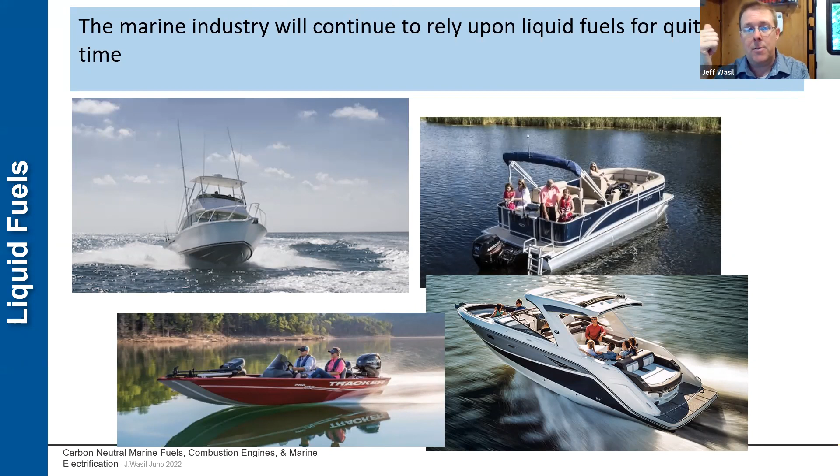This is really driven by two things. Number one is the very slow retirement rate of boats - 12 million registered power boats in the United States. Of that, we're seeing about just under a 2% annual retirement rate. So it's going to take a long time to turn this fleet over.

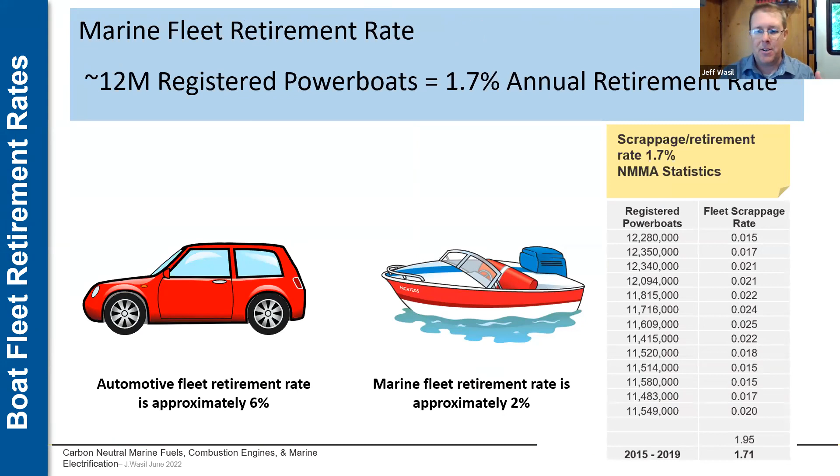Number two is really with respect to energy density. If you take Tesla as an example, they've got a long range model, 348-mile range, looks like a car, drives like a car. The acceleration is second to none. It's incredible if you haven't driven one. But a lot of people don't realize that same vehicle, if it were operating according to the way a boat operates, the ICOMIA duty cycle, it would only have about a 33-mile range. And that's because it takes over 10 times the energy to move a recreational boat through the water compared to a car.

Now, just to be clear, we're talking about boats that are planing. We're not talking about displacement hulls. We're talking about planing boats.

So a lot of what you're seeing in terms of policy right now is related to the ability for electric vehicles to reduce CO2 emissions over their lifetime. If you take a look at this graph here, you'll see that the initial production of the battery electric vehicle results in about 50% more CO2 emissions than the internal combustion powered vehicle.

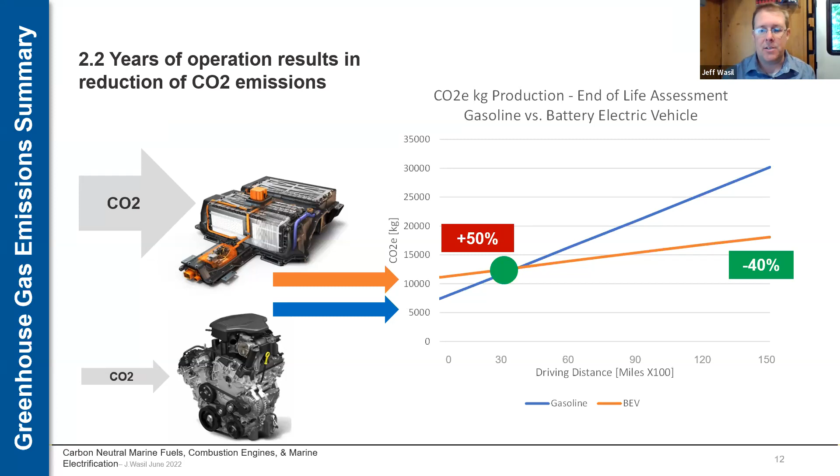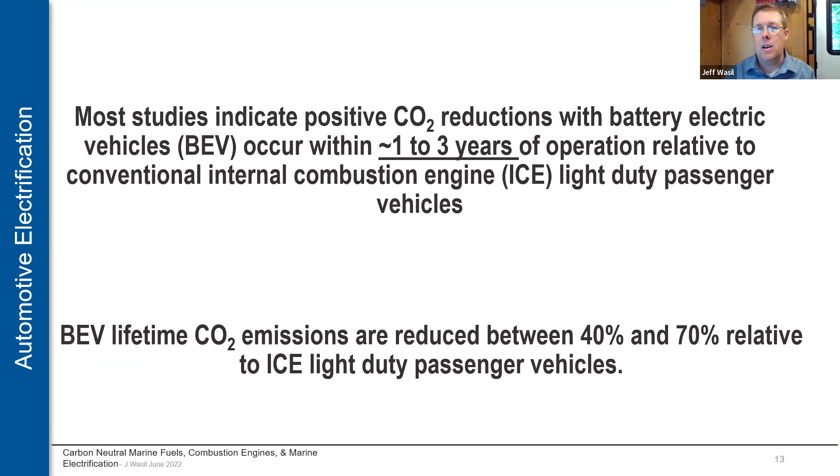However, at the end of its useful life, which is 150,000 miles, you'll see that emissions of CO2 have been reduced by about 40%. You reach a break-even point just over 2 years of operation. And that's what the majority of studies are showing. They're showing that we have positive CO2 reductions with battery electric vehicles occurring within about 1 to 3 years of operation relative to internal combustion engines. The battery electric vehicle lifetime CO2 emissions are reduced by 40 to 70%. So that's why you'll see such a big push toward electrification for the automotive industry.

So the solution is clear, right? We need to ban all combustion powered boats and move completely to electric. I get folks all the time that say, hey Jeff, why are you continuing to work on internal combustion engines in addition to electrical development? Just put a battery pack in it and an electric motor and you'll be done.

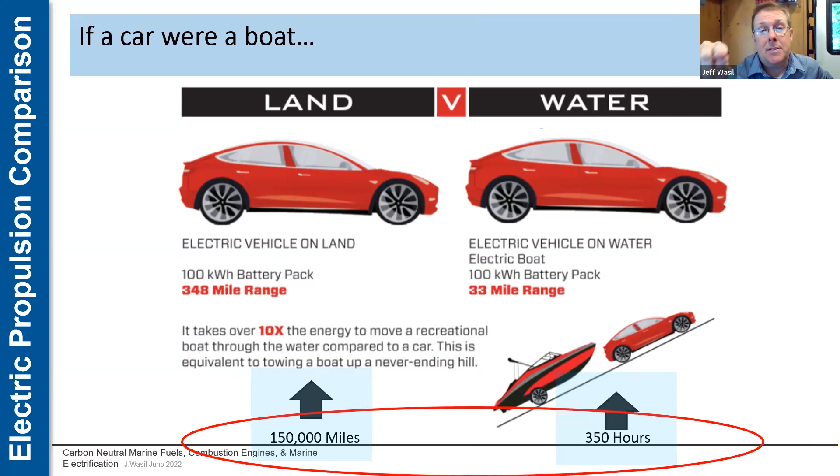Well, there's certainly some challenges to that, and I just want to explain this. I want to come back to this slide because this is really important. If you look at what's happening with battery electric vehicles, everything is amortized over a period of 150,000 miles of operation. A typical recreational boat, according to the EPA, is used about 35 hours a year, with a 10-year useful life. So these are very different fundamental things.

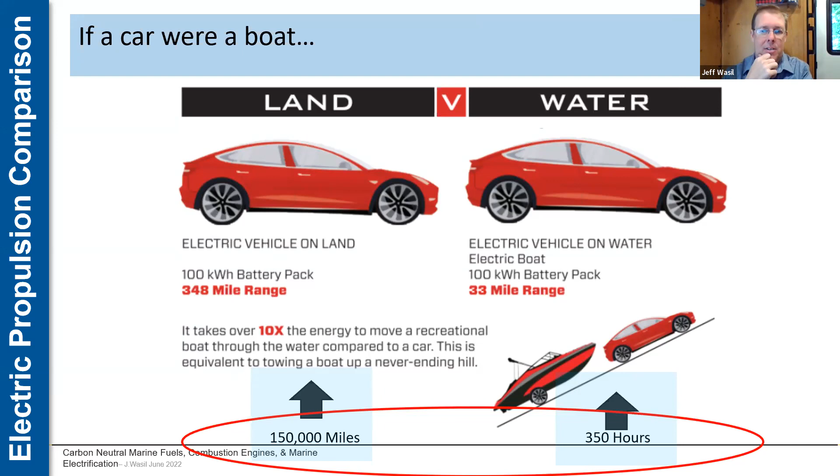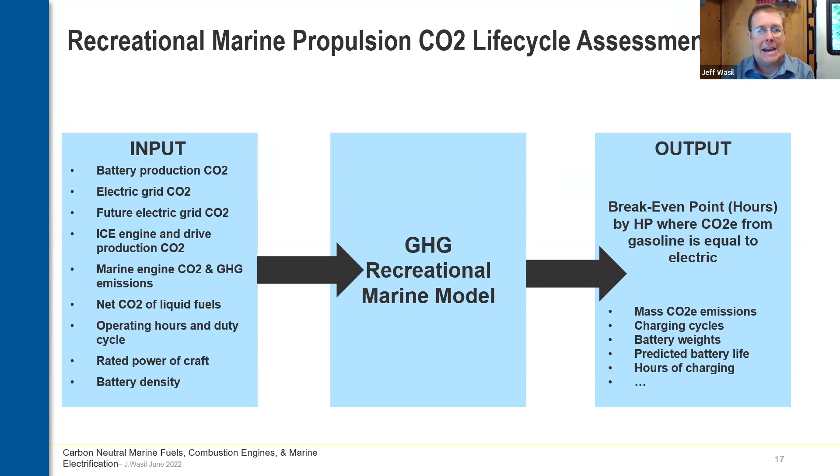In order to answer this question, how effective is battery electric propulsion in reducing CO2 emissions from the marine sector, I needed to create a model. For inputs, I'm looking at the amount of CO2 to produce a battery, the CO2 from the generation of electricity, the future electric grid, battery density, future battery density, the types of craft, and so on. The output from the model is the break-even point in hours by horsepower, where CO2 emissions from gasoline is equal to that of electric.

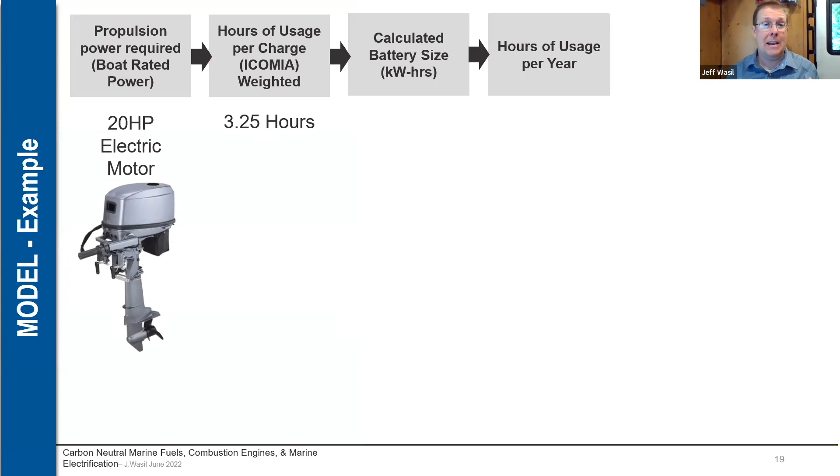Let's take a look at the model for a 20 horsepower electric motor. You're going to operate that for a period of 3.25 hours, so this is really your range. According to the duty cycle, you're going to have just over 3 hours of range. There's some science behind this number which I won't get into right now because we don't have enough time. But this calculates out to about a 10 kilowatt hour battery pack, and you're going to operate it 35 hours a year, or over 350 hours over a 10-year period.

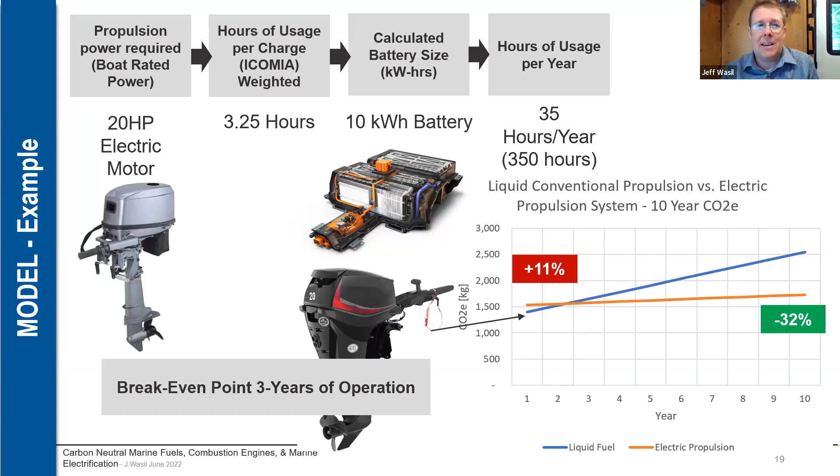So let's take a look here. The initial first year of operation, that electric motor and battery is going to result in about 11% more CO2. But by the time you reach the 10-year end of useful life, you've reduced CO2 emissions by about 32%. You break even over a period of 3 years. So this is pretty reasonable—this is very, very plausible in terms of its ability to reduce CO2 emissions.

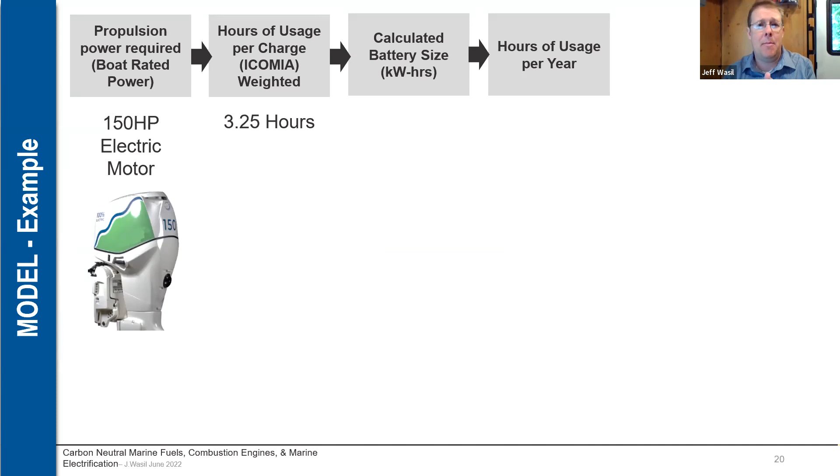Let's take a look at a 150 horsepower motor. Same thing, we're going to have just over 3 hours of actual operation according to the ICOMIA duty cycle. So we require a 75 kilowatt hour battery, and we're going to operate at 35 hours a year. In this particular example, because of the energy intensive process of producing the battery, your year one operation of this vessel is going to increase CO2 emissions by about 250%. You'll reach a break-even point at 9 years, and you'll have the ability of reducing emissions by about 10% at the end of that 10-year period.

Now a lot of people say, hey Jeff, 35 hours a year is not a lot, I'm going to spend a gazillion dollars on this electric boat, I'm going to use it more than that. So let's say 60 hours per year. Here you'll start to see the situation gets a little bit better. Your initial year one, you're going to increase CO2 emissions by about 181%. You'll reach a break-even point of 5 years of operation, and by the time you're done, you'll reduce emissions by about 35%.

So let's take a look at one more scenario here. Let's suppose for a minute that you have a lake that has a supercharging station, and you're willing to sacrifice the range in order to have a smaller battery. So instead of 3 hours, you have 1.5 hours of operation. This brings your battery size down to 35 kilowatt hours, and you're going to operate 60 hours a year.

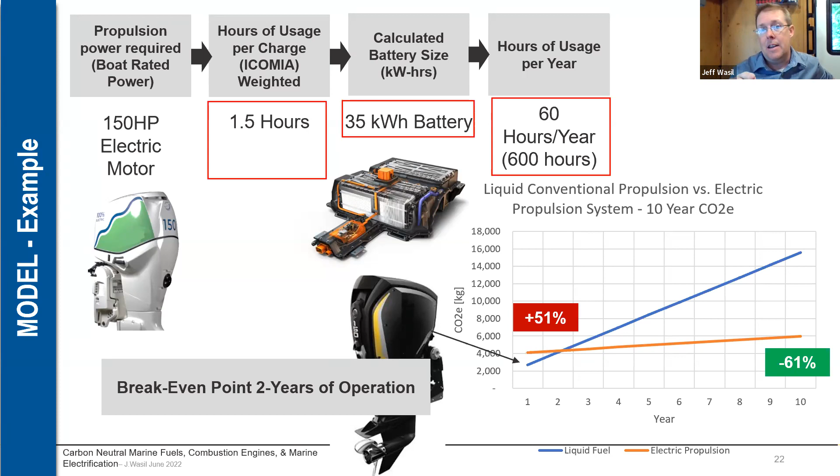However, there's a fundamental flaw in this assumption, and that has to do with the charging cycles of the battery. A typical lithium ion battery only has about 300 to 500 cycles. This is going from nearly fully discharged to fully charged before you reach a degradation in battery state of health. And with this example, you're bumping up right along that 500 cycles.

So back to the Tesla example again, you had 150,000 miles, 348-mile range. Over the course of that 150,000 miles, you're going to have worst case 431 cycles. So that's really where it gets a little bit tricky with

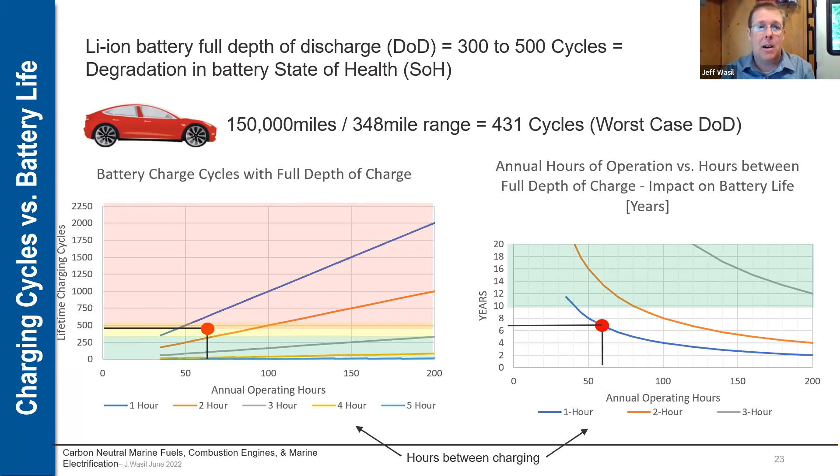Boats. Now, how do you get around this? Well, really, fundamentally, you would need to use a larger battery, but the challenge is the battery weight. Certainly, I don't think we have any issues with electric motors in terms of their ability to propel boats, but the challenge is always related to the battery, and that's what everyone in the world is working on right now, trying to reduce the weights of batteries.

It's not as big of an issue in automotive because of rolling mass, but here's a perfect example. 6 pounds is the weight of a 1 gallon of gasoline. Of course, you can't use all the energy in a gallon of gas. So the equivalent amount of energy is about 152 pounds of batteries. So you can see how quickly a typical 30-gallon gas tank would weigh about 4,500 pounds.

That would reduce your person's capacity and flotation and the rest of the boat. So that's really fundamentally one of the challenges that we're dealing with, is trying to plane that boat.

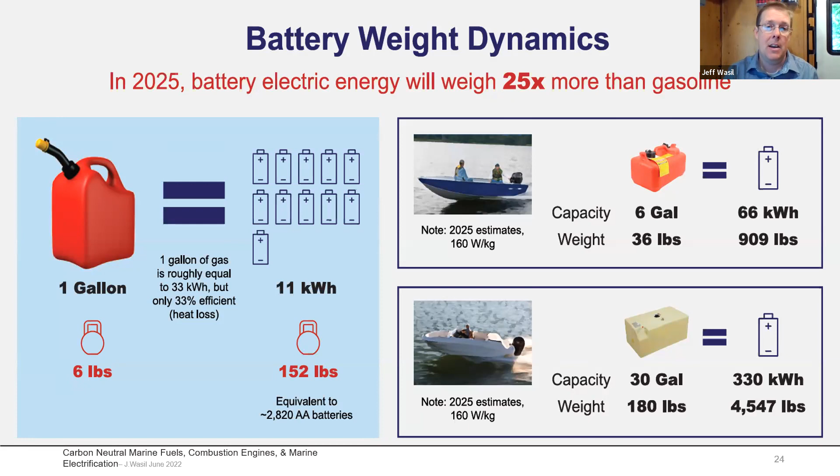So we'll wrap up here in a second. So let's take a look at the model. So let's summarize for a second.

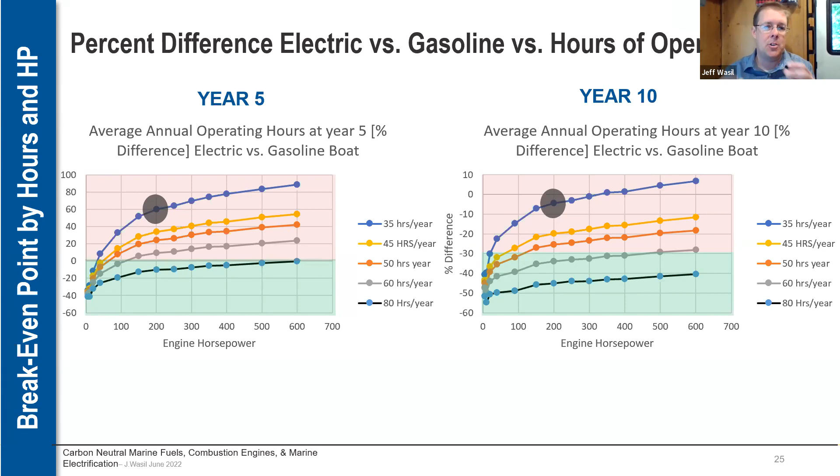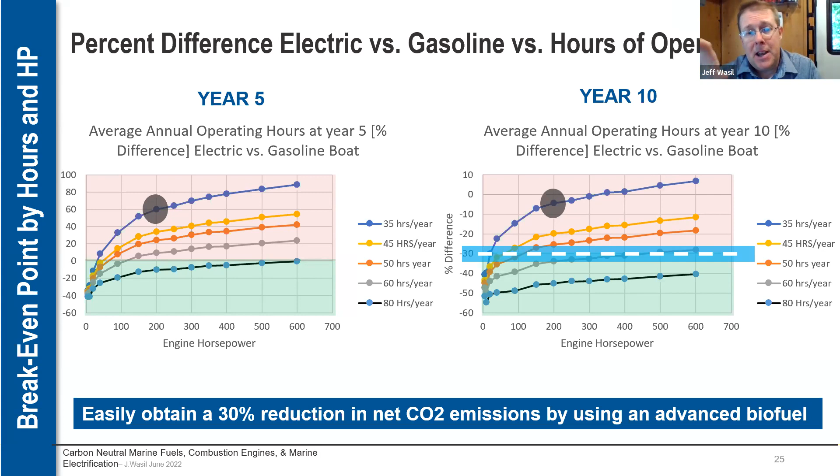If you had a 200 horsepower electric boat operating 35 hours per year, at the end of year 5, you would create about 60% more CO2 than an internal combustion engine. At the end of year 10, which is the graph on the right, you would reduce CO2 emissions by about 5%. Now you can really start to see how the hours of operation is really critical in understanding the CO2 reduction potential. And you can see as you go smaller engines, it's also a lot easier to achieve positive CO2 reductions with electrification.

So now it's very easily we can obtain a 30% reduction in net CO2 emissions by using an advanced biofuel. And a lot of folks say, hey, Jeff, biofuels are not sustainable. They tear up the land, they divert food crops. And I would tend to agree with those folks in the context of a 146 billion gallon gasoline market.

We're producing about 16 billion gallons of ethanol in the United States. It's just not simply enough. We just don't have enough biofuel to really make a meaningful difference. And that's why you're seeing electrification gaining popularity.

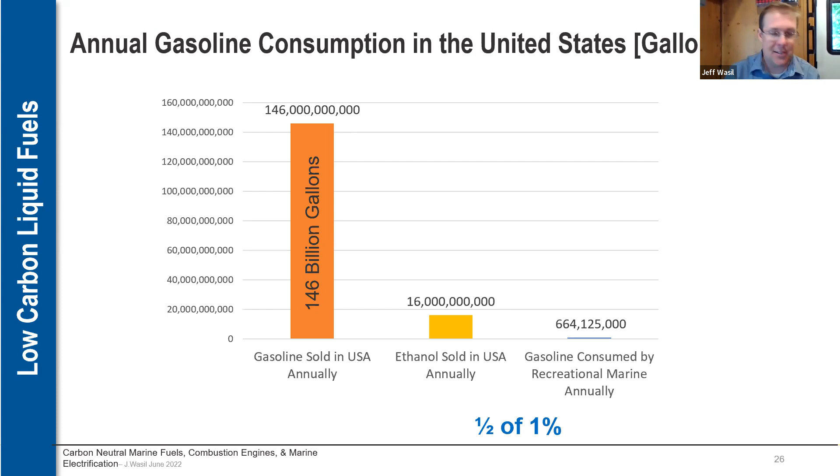Well, guess what? Recreational marine only accounts for about 665 million gallons, which is, by the way, 0.5% of the gasoline consumption in the United States. So we have an opportunity here. There's really two industries that can benefit significantly from liquid fuels or e-fuels.

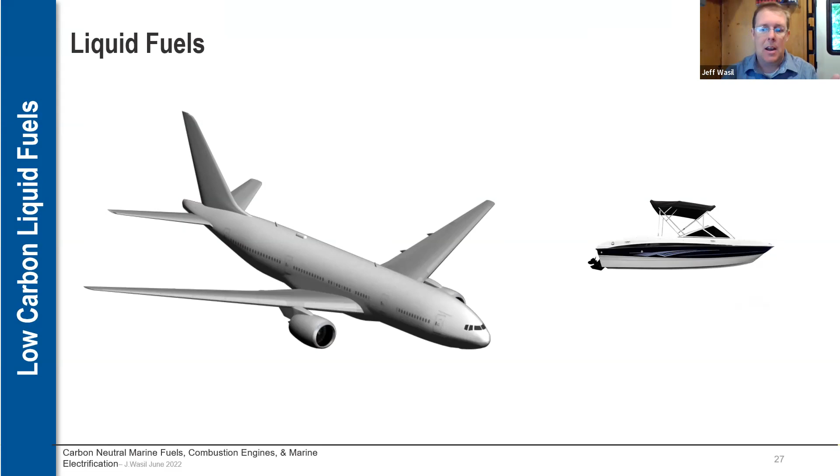Aviation is one of them. They're pushing hard for that. You see a lot of work with sustainable jet fuels. We've pioneered a lot of work as an industry on biobutanol, helping bring a next generation biofuel to the consumers, and it could address a lot of the existing products that are out there.

So in summary, the life cycle carbon emissions of propulsion systems are highly influenced by the hours of operation and power output level of the vessel. So if you're going to buy a boat and you never use it, then certainly, the CO2 emissions are going to be much lower than if you were to produce that battery electric boat and not use it.

Lower horsepower marine engines could more easily justify electrification from a CO2 reduction standpoint, particularly with lower operating hours. We need to have careful understanding of the application, and the annual hours of use for electric boats need to be considered. So it's not just a blanket statement.

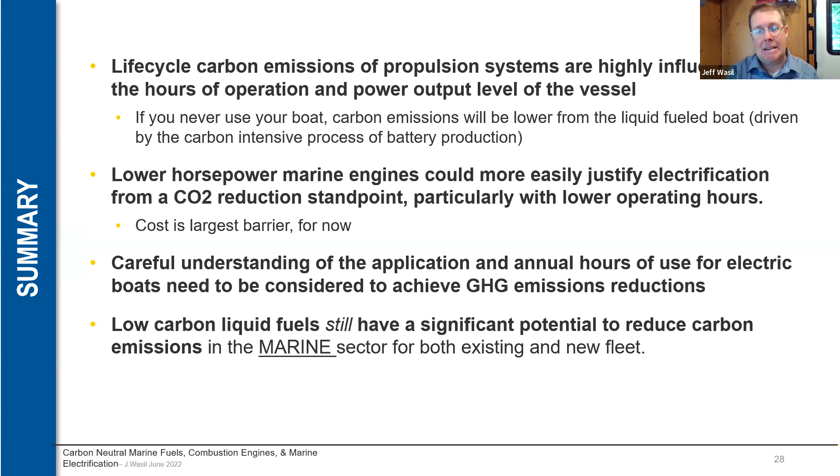You've got to really fundamentally understand how many hours you're going to put on the boat and how you're going to use that. Low carbon liquid fuels still have a significant potential to reduce carbon emissions in the marine sector, both for the existing fleet, the 12 million boats that are out there today—you can have an impact right away—and for the new fleet that we're working on. So really what we want to do in terms of next steps is to aggressively pursue a balanced approach.

So, diversified energy sources and technology. We want to continue to invest in electrification, hugely important for our industry. We have to find ways of getting electrification and products to consumers. We want to invest in hybrid electric technologies. These are products that will enable customers to have the range they need and reduce the battery size, which is so important for weight. I talked about biofuels and sustainable liquid fuels, e-fuels, very important for a lot of those products that are not going to be easily electrified.

And I can't understate the importance of advanced hull design. As an industry, for years we've simply improved the performance of a boat by throwing more horsepower at it. It's an easy way - instead of one outboard, you put two outboard engines on it. Advanced hull design, easy planing hulls, is really key. We can talk about hydrofoils and foiling devices, and there are a lot of things out there that can help improve this, but that's going to be critical as we increase the number of boats utilizing electrification.

So one last thing - why was former President Jimmy Carter in my presentation? During the oil embargo of the late 70s, the Carter administration banned all weekend boating. I can't say how devastating that was to our industry. They banned it not because boats were unnecessarily consuming too much fuel - it was because of the perception that boats were consuming too much fuel.

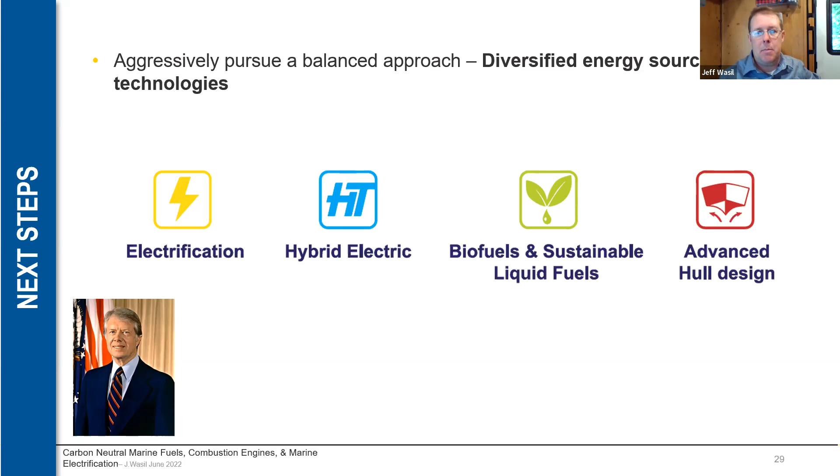And that's the issue we face as an industry today - it's really perception. As the automotive industry pushes really hard to move toward electrification, everyone else has got this electrification on their minds, investors and the rest. We have to be careful that we transition in an appropriate way so that we don't end up with a ban on our products out in the marketplace.

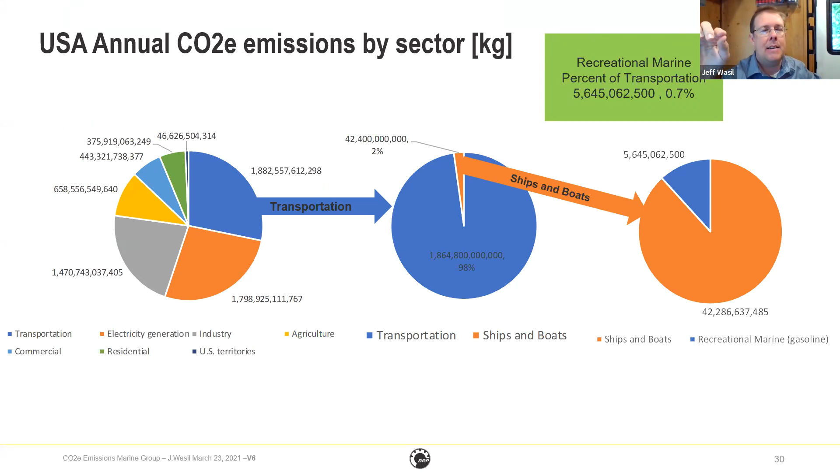So one last slide, just as a factoid: recreational marine accounts for 0.7% of transportation in terms of CO2, and 0.3% of overall CO2 sources in the United States. Not that that gives us a free pass, but it puts into context our contribution as an industry.

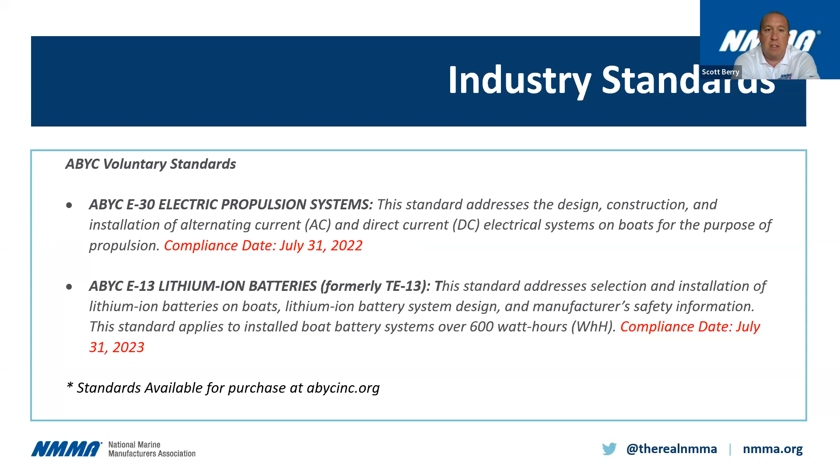If you'd like more information on these standards or would like to read through them yourselves, they're available for purchase through the ABYC website at abycinc.org. So those were the domestic standards covering electric propulsion and lithium ion.

Now I'd like to touch on another segment, a large segment for the US manufactured shipping product, and that's into the EU. So there are two standards currently under review, ISO 16315 and ISO 23625. These two standards have scopes that look closely or similar to the ABYC scopes, and that's not by accident. The US has multiple representatives that sit on these working groups, and we do our best to work and harmonize these standards so we can build consistency across the industry for the manufacturers.

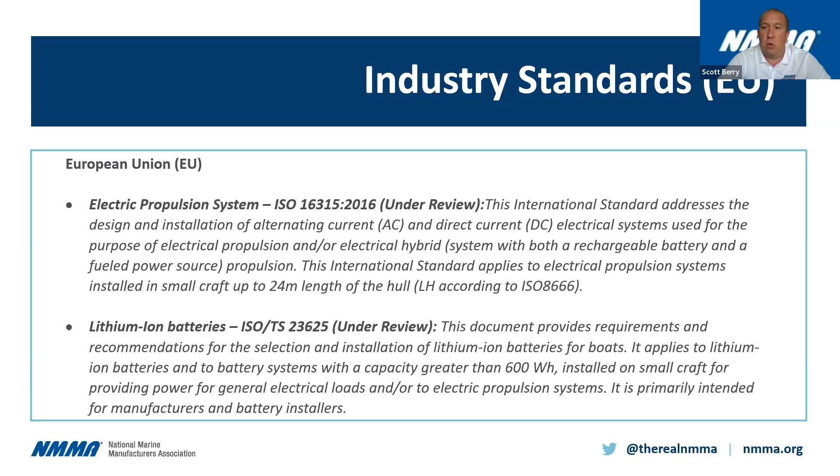In addition to the ISO and ABYC standards, there's additional work going on. One point I'd like to make is the ISO 8665 Part 2. This standard is an electric propulsion power rating standard, again, to promote consistency across the industry.

Under the Boat Builders Toolkit, you'll find those policies that are already posted, which include boat testing procedures for outboard boats greater than 2 horsepower and vessels powered by personal watercraft. So be on the lookout for a notification from the Coast Guard or the NMMA on when this electrification policy is published. That's my quick review of the standards that impact electric propulsion, as well as the lithium battery installations.